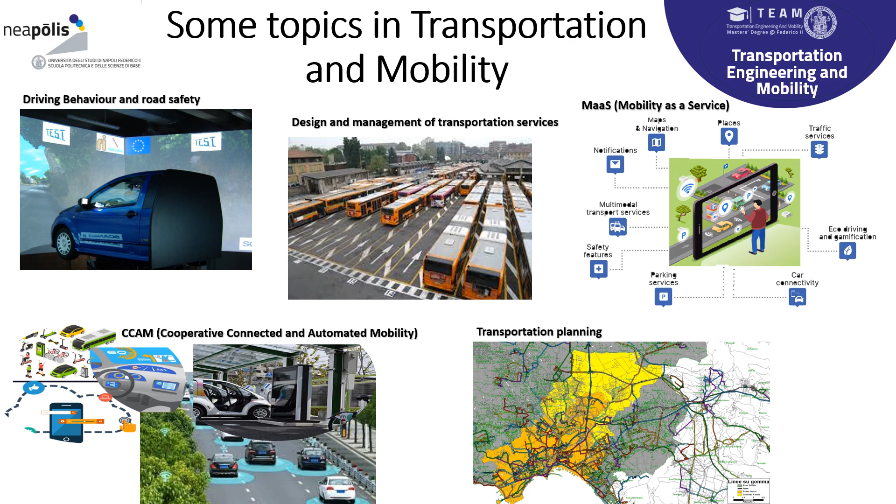These are some effects. One of the terrific effects could be on the capacity of roads to increase their throughput, for instance. Another very relevant aspect is that this helps pave the way for the automation of mobility.

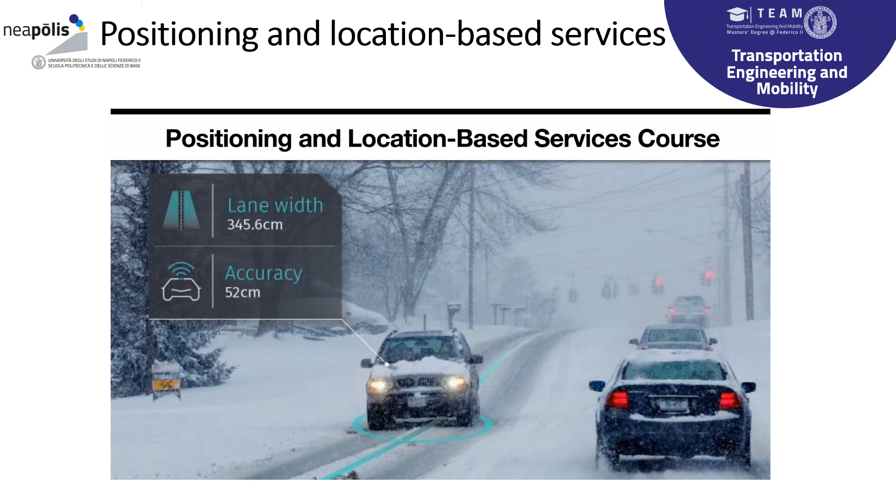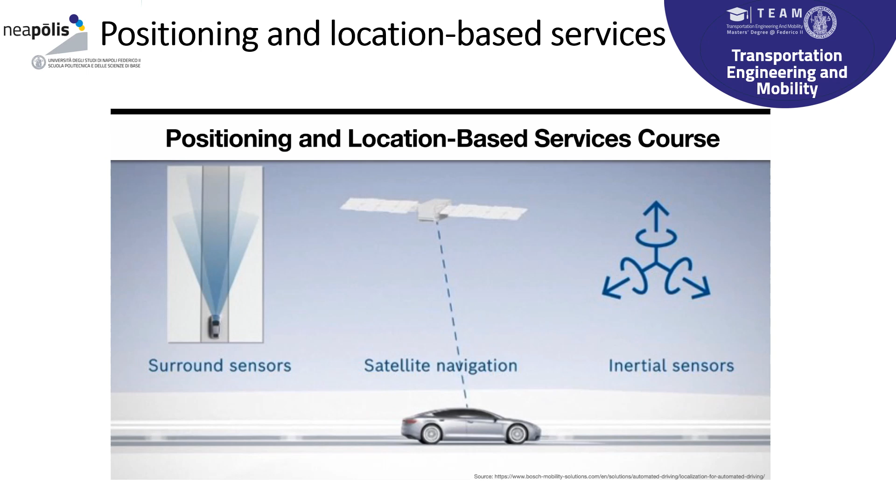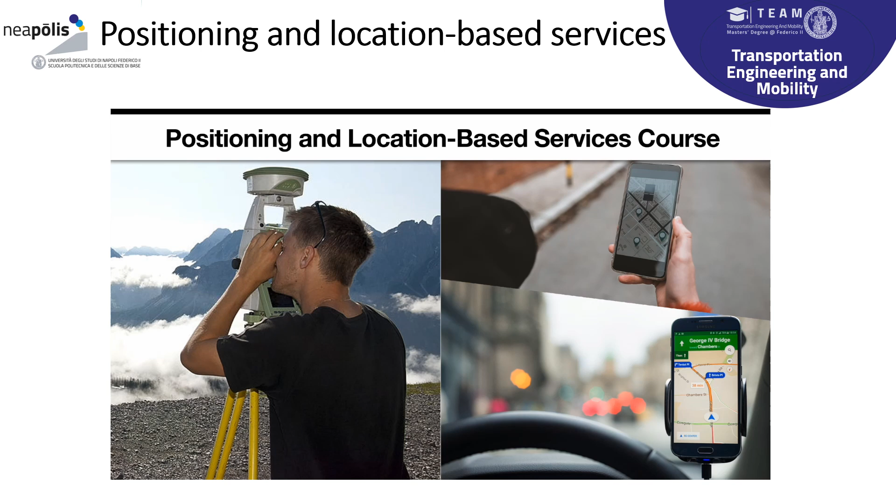Students must demonstrate that they have learned the fundamental notions regarding measurements and methods for geodetic positioning, concepts and description of satellite positioning and navigation systems, inertial navigation, outdoor and indoor applications, and location-based service technologies and issues. By applying the acquired skills, students must be able to collect, process, analyze, and utilize measurements and information for the real-time positioning of moving vehicles.

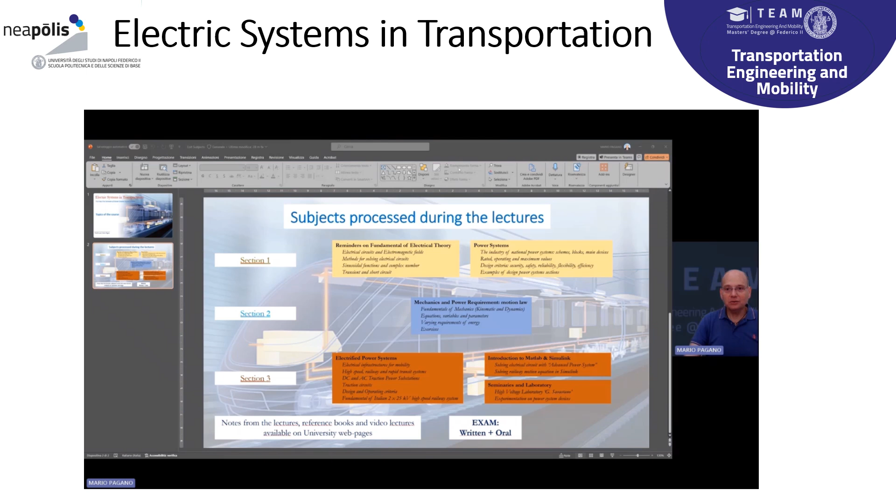The course will be held at the first year, first semester of your Master Science degree. The idea is to provide the ability to design controllers, so algorithms able to steer the dynamics of a system in order to follow a commanded behavior.

And the idea is to apply it to steer or to solve some transportation problems. So the idea is to steer the dynamics of vehicles, traffic flow, vehicular networks.

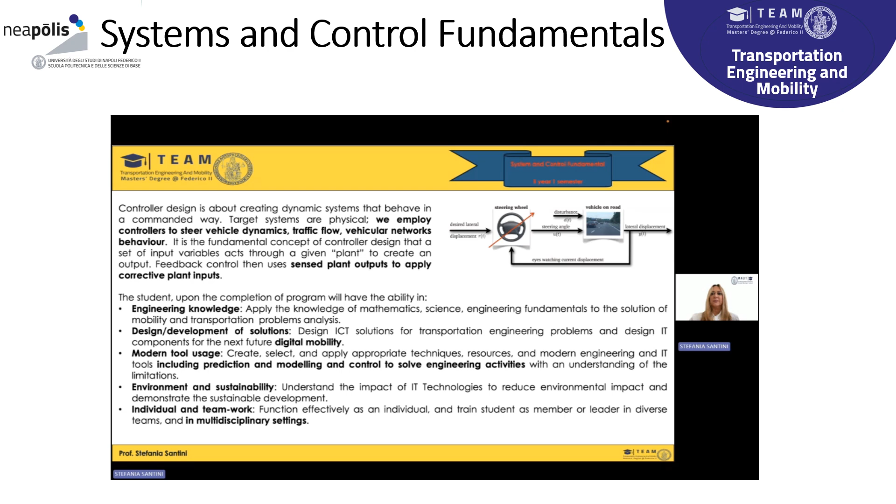The course will provide engineering knowledge in the sense that we are going to apply mathematical and scientific concepts to solve control problems, but also we are going to provide some knowledge of ICT solutions in order to implement digital mobility, or to address problems related to digital mobility, better to say.

So the idea is to provide theory, methodology, and technology for the development of intelligent control algorithms and apply them to ITS problems and CCAM problems, cooperative connected automated mobility problems.

We are also going to deal with software, and the idea is to use MATLAB Simulink in order not only to design a controller, but also to verify the achievable performance in a simulation setting.

The professional outcomes of the course are related to the fact that we are going to complement the traditional skills of transportation engineering with some ICT knowledge in order to tackle and solve the challenges arising from the next future

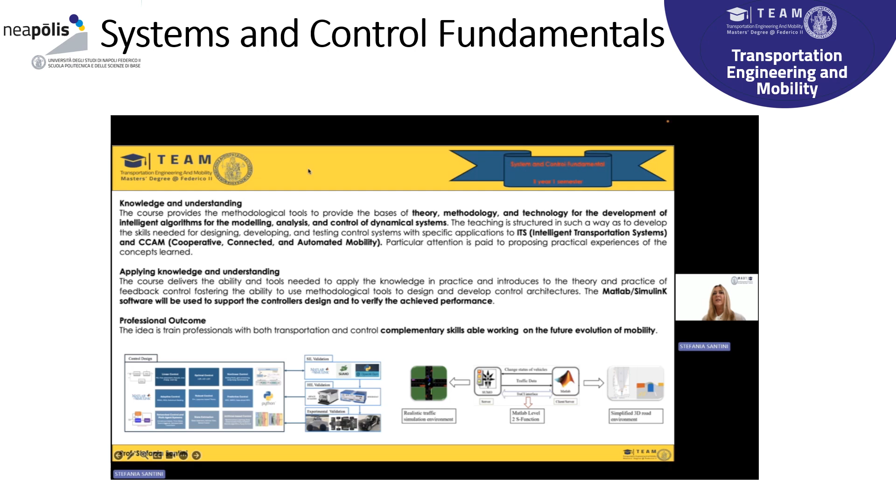My name is Giancarlo Sperli, and I am the professor of the Machine Learning and Big Data course. In this course, we will be investigating methodologies and models of artificial intelligence in order to address different kinds of tasks, for instance, clustering, regression, and classification.

In particular, we are focusing on the strategies for training these kinds of models according to unsupervised or supervised settings. Furthermore, to improve and enhance the training process, we will leverage a large amount of data falling under the umbrella term called big data.

In particular, we analyze the concept of big data analytics that aims to infer from this large amount of data knowledge and information that could be used for improving the decision-making process.

Hi everyone, I'm Luigi Pariota, and I am the teacher of the course of Modeling of Transportation Systems. The course has the objective to provide students with all the knowledge that they need to correctly understand, model, and simulate transportation systems.

Specifically, within this course, we will provide you with the tools that you need to correctly represent the supply model, correctly estimate the demand, the so-called mobility demand, and to understand in which way these two sub-models, subsystems, interact with each other.

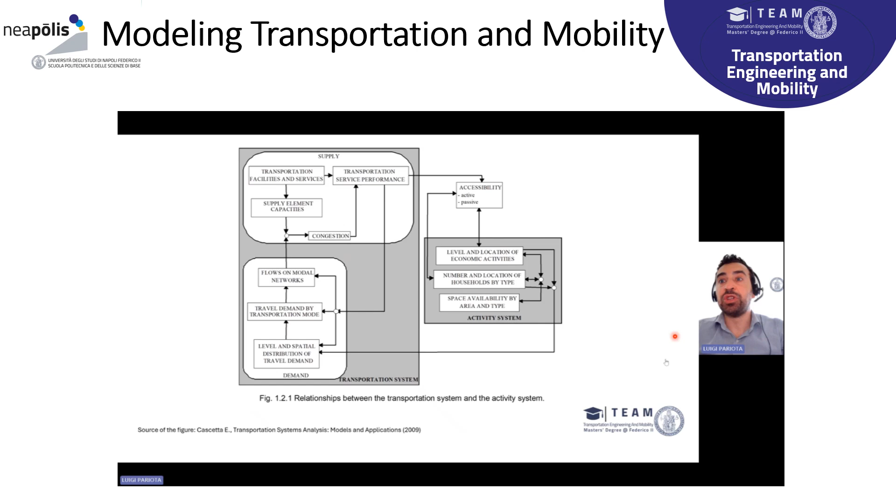Hello everyone, I am Giovanni Forte, and together with Stefania Stevenazzi, we are professors of the course of Digital Maps and Geological 3D Models. The course exploits general knowledge of engineering geology for developing digital applications.

It focuses on natural phenomena and the role of geological variables in environmental conditions in engineering design and construction. The course introduces the general concepts of geological data acquisition through in situ and remote sensing survey techniques,

and provides the basics for managing and processing geospatial data with geographic information systems, also creating 3D geological models. These tools will allow students to acquire knowledge and software skills for the collection, management, and analysis of data, fundamental for planning and engineering infrastructure, and for identifying hazards and natural resources that interact with them.

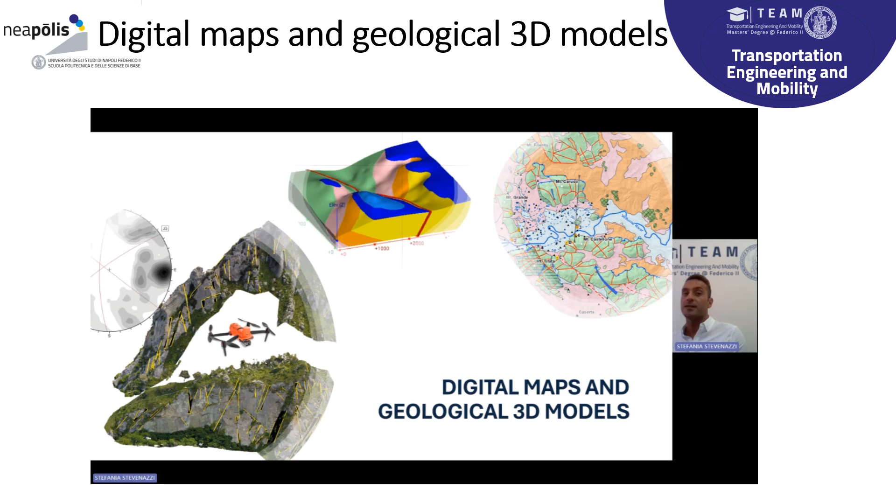The Sustainable Road Materials course prepares the engineer for knowledge of innovative materials and technologies that are constantly evolving in the field of road paving. The course provides all the tools necessary for the identification of secondary raw materials to replace those traditionally used in road paving, provides knowledge of the instruments and methodologies useful for the mechanical characterization, and transfers the congenial tools for design of different sustainable stratigraphic solutions, up to the environmental impact assessment using the LCA method.

The students who follow the Sustainable Road Materials course will have the opportunity to work in different sectors of road engineering, such as company production plants for mixtures, or in public administration, covering various roles such as site manager, design director, or even management roles.

Transport planning and appraisal deals with the principles, strategies, and methodologies that underlie sustainable planning of interventions on the transportation system, both physical, organizational, and managerial, for passengers and freight. The real novelty of the course deals with the whole decision-making process, where not only the decision maker, private and public, is involved, but also the analysts and designers - the real novelty is represented by the stakeholders. So public engagement will be a significant part of the whole decision-making process.

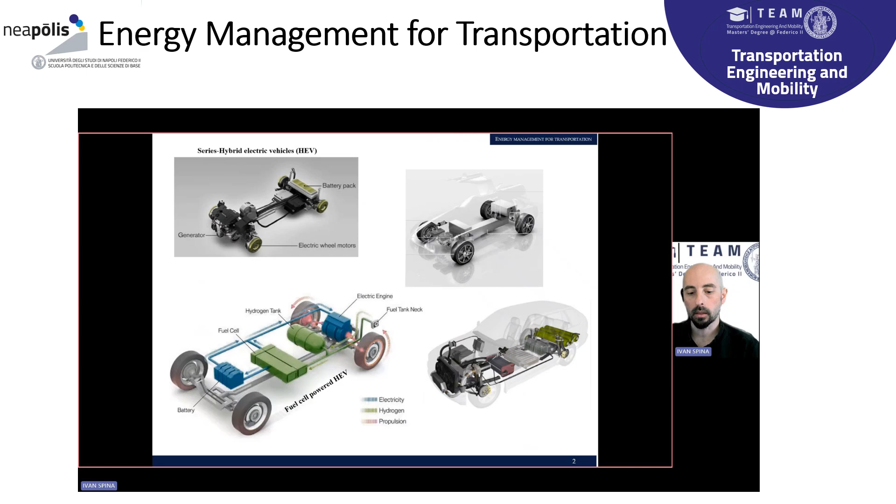This course aims to provide knowledge of the main constituents of electric propulsion systems. To understand the energy management in transportation, we will see what's inside a hybrid car. The powertrain of electric and hybrid vehicles will be studied, including road vehicles but also railway systems.

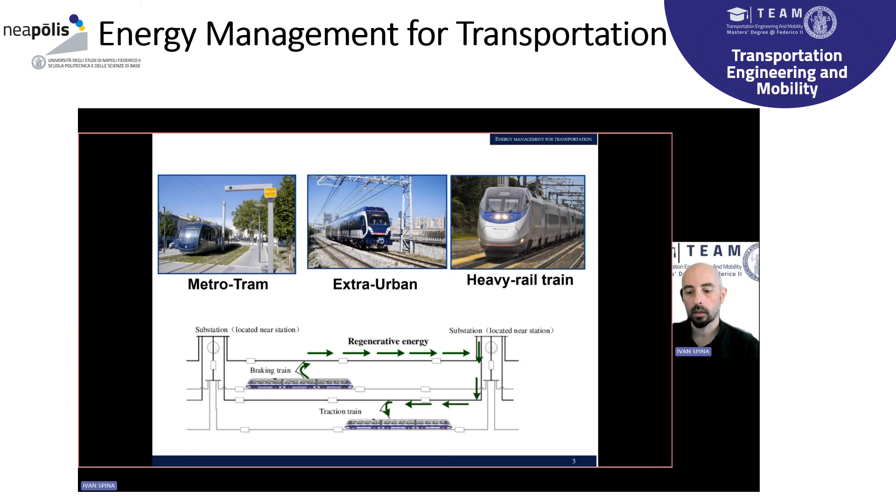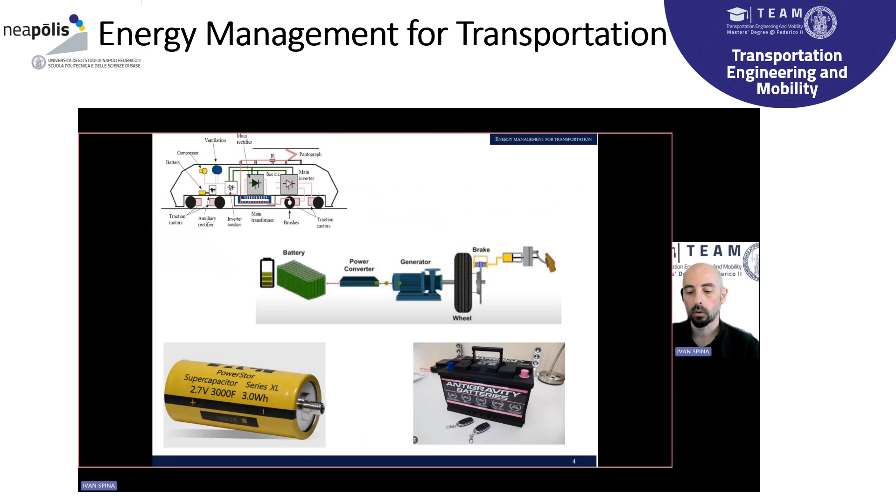What happens during braking operation of a bulky train? The braking energy comes back from the wheels and is redirected to storage systems like batteries or supercapacitors. The use of power converters allows control of the energy flow, pursuing environmental sustainability goals in the incoming energy transition.

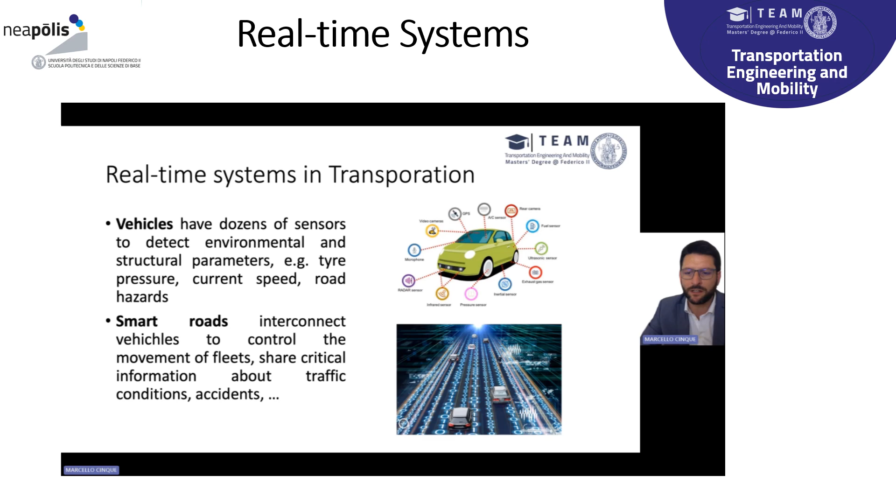Real-time systems are used in everyday life to control cyber-physical systems, like transportation systems, vehicles that have dozens of sensors to read the real conditions of the machine and the road, or smart roads. In this course, we are going to provide knowledge about operating systems and programming languages to develop real-time systems, particularly in the automotive domain, and also provide the skills to design, tune, and develop real-time systems.

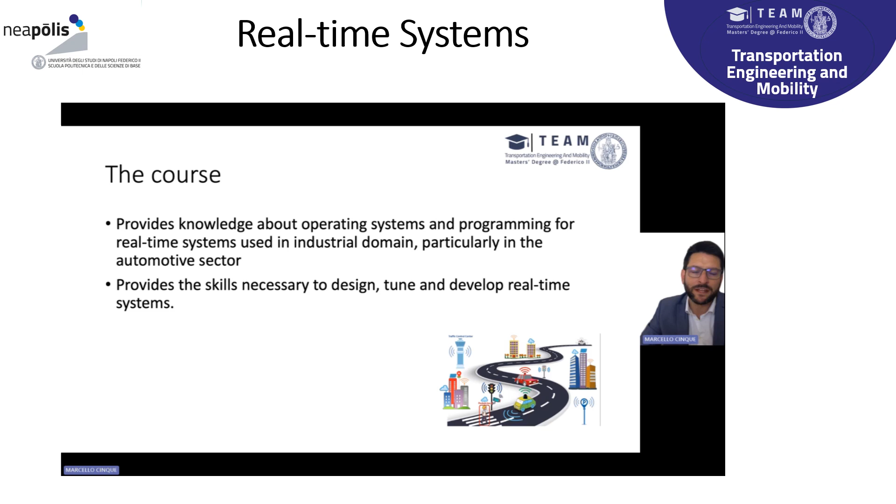The main goal of the course is the knowledge of the performance of geotechnical components involved in transportation infrastructures against extreme events, whether geophysical or hydrological. This matters because the failure of geotechnical components may cause the closure of road arcs that may produce an effect on the whole network performance. The content of the course is useful for transportation engineers who want to become experts in infrastructure systems, and for managers involved in decision-making contexts.

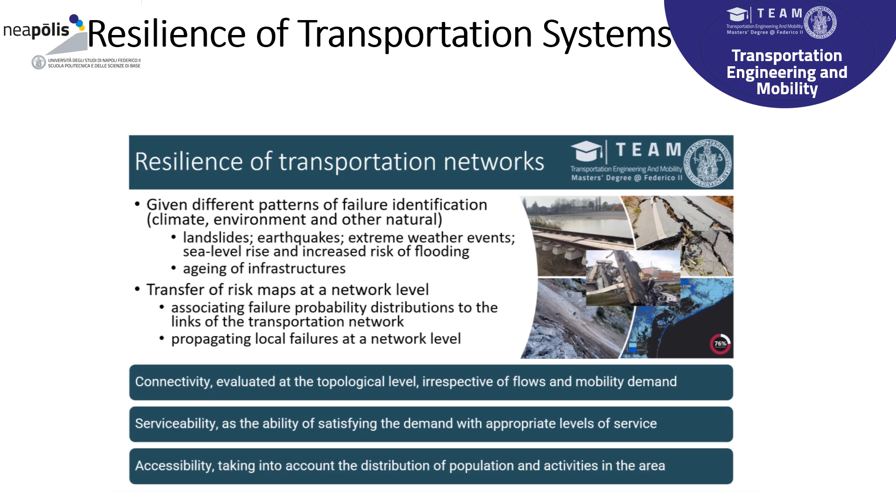Students will learn the basic principles associated with the propagation of disruption effects and the assessment of impacts under different perspectives: topological connectivity, serviceability of the network—which implies taking into account the demand that loads the network and the equilibrium between transportation demand and supply—and finally, the variation of accessibility, which can be taken as a measure for impact, considering the effects on the distribution of activities and population in the study area.

Resilience issues due to infrastructure aging are gaining momentum worldwide, especially in the most developed countries, and the economic impact of the topic is increasingly relevant. Students with a robust theoretical background and practical abilities related to the analysis of the resilience of transportation systems will have increasing work opportunities, mainly in public administration and road operators.